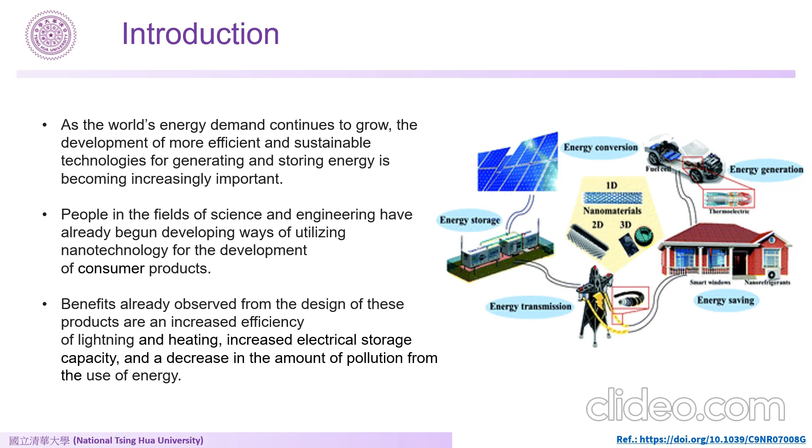If we talk about energy, nanotechnologies provide the potential to enhance energy efficiency across all branches of industry and to economically leverage renewable energy production through new technological solutions. We have an energy source, then the energy source is converted. Further, that energy is distributed and stored and then used. If we look at the diagram, nanotechnologies provide essential improvement potentials for both conventional energy sources and renewable energy sources like geothermal energy, sun, wind, water, tides, and biomass.

Further, talking about energy conversion, conversion of primary energy sources into electricity, heat, and kinetic energy requires utmost efficiency in fossil fired gas and steam power plants. It would help to avoid a considerable amount of CO2 emission. Higher power plant efficiencies, however, require higher operating temperatures and thus heat resistant turbine materials.

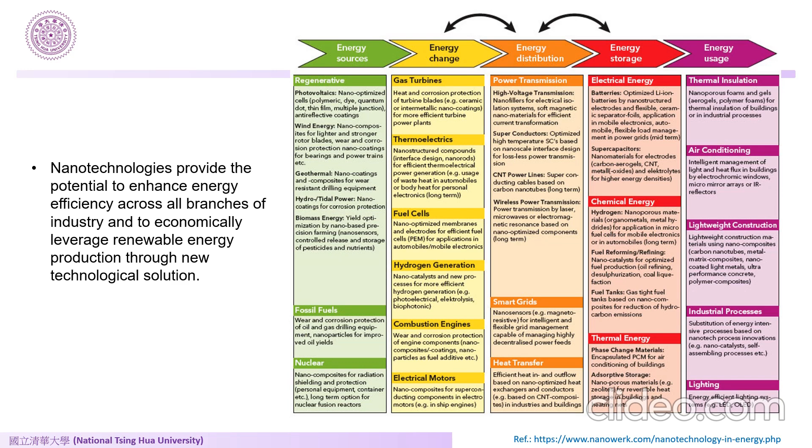Commonly used nanomaterials in energy. There are numerous nanomaterials that are used today for the storage and production of green energy. But the most commonly used for decades are graphene based materials. There is enormous interest in the use of graphene-based materials for energy storage. The research on use of graphene for energy storage began very recently, but the growth rate of related research is rapid.

Due to its high surface area, large electrical conductivity, lightweight characteristics, chemical stability, and high mechanical flexibility, graphene can increase the energy capacity, charge rate, and stability of lithium ion batteries. In practice, the lifespan and recharging time of batteries used in electronic applications, ranging from electric vehicles and mobile phones to laptops, could significantly improve. Among various organic and inorganic materials, graphene exhibits strong potential to meet energy demand in various ways. Graphene and its various composites can also be used in supercapacitors to enhance power density and rate performance.

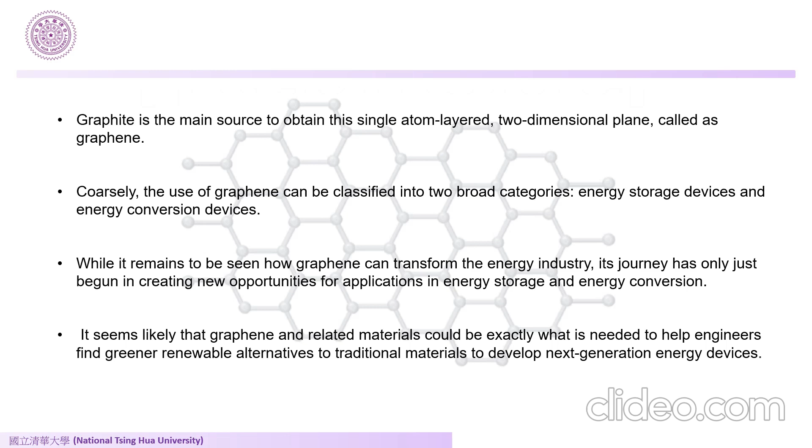Graphite is the main source to obtain the single atom layer, two-dimensional plane called graphene. The use of graphene can be classified into two broad categories: energy storage devices and energy conversion devices. While it remains to be seen how graphene can transform the energy industry, its journey has only just begun in creating new opportunities for application in energy storage and energy conversion. It seems likely that graphene and related materials could be exactly what is needed to help engineers find renewable alternatives to traditional materials to develop next generation energy devices.

Next we come to silicon based nanosemiconductors. Silicon based nanosemiconductors have changed the definition of nanosemiconductors. Silicon nanoparticles are a fascinating area of science with significant technology implications. They are generally considered non-toxic and have good biocompatibility. They utilize silicon nanoparticles in order to absorb a greater range of wavelengths from the electromagnetic spectrum. This can be done by putting many identical and equally spaced silicon rods on the surface.

In the field of storage sensors, silicon nanoparticles are promising materials in various applications due to their unique properties like large surface area, biocompatibility, stability, and excellent optical and electrical properties. The arrangement of silicon particles allows solar energy to be reabsorbed by many different particles, exciting electrons and resulting in much of the energy being converted to heat. Then the heat is converted into electricity.

Lastly, coming to nanocellulose based materials. Nanocellulose offers a unique combination of properties including flexible surface chemistry, transparency, low thermal expansion, high elasticity, anisotropy, and the ability to bind the other conductive materials, enabling extensive application in the flexible energy storage devices.

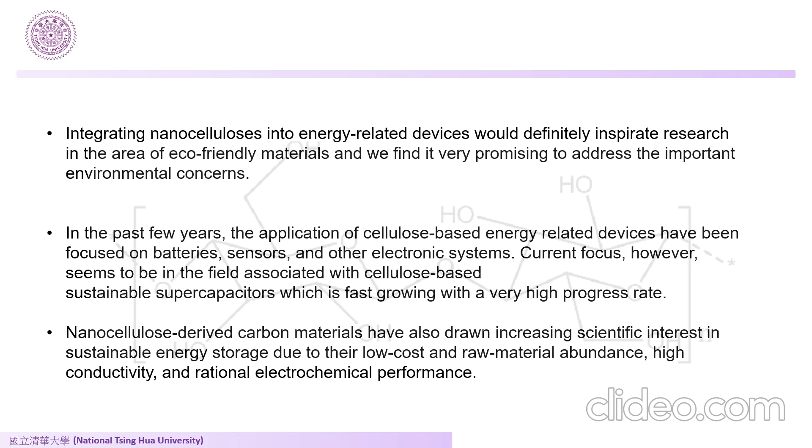So, these are some of the popular materials that have been used for green energy in the environment. Thank you. This will be continued by other group members.

I am Shirish Killeda. I am going to deliver a presentation on energy applications of nanotechnology, and my part is nanomaterials and nanostructures in energy. So, one-dimensional materials. One-dimensional nanomaterials are widely explored with the aim to enhance the energy harvesting efficiency and to enable flexible nanogenerators due to their superior light absorption, excellent electronic conduction, high mechanical strength and ultra-low thermal conductivity.

The advantages of porous one-dimensional nanomaterials for energy storage include: the smaller crystal size increases the utilization of active materials, resulting in enhanced specific capacity. The porous one-dimensional nanostructures provide greater surface area than that of a non-porous system. High surface area ensures effective contact of the electrolyte to the electrode surface, facilitating charge transfer across the electrode-electrolyte interface.

The ion diffusion length is further shortened since creating porosity in one-dimensional nanomaterials can effectively decrease the ion transport dimensions. The pores in one-dimensional nanostructures are usually continuous, which offers interconnected ion diffusion pathways through the electrolyte to the active material. The empty spaces in porous one-dimensional nanostructures accommodate the volume changes associated with the electrochemical reaction, thus limiting structure degradation during cycling. The porous one-dimensional nanostructures can assemble into interconnected networks, avoiding the use of binders and leading to freestanding flexible energy storage applications.

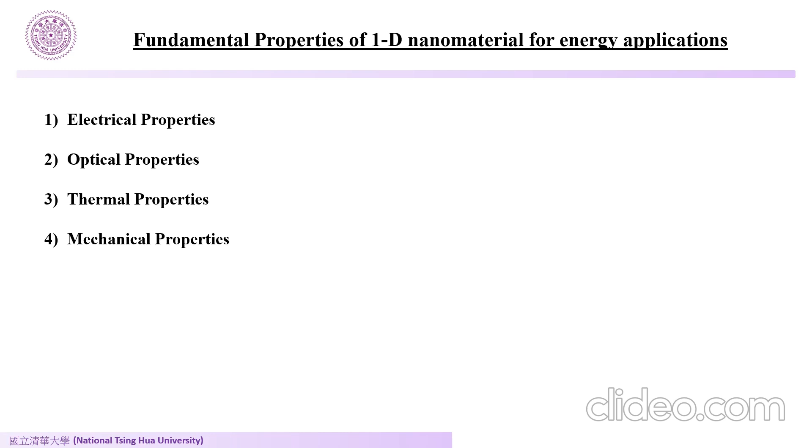The second is CdS nanorods made by mixing cadmium nitrate. The efficiency of CdS nanorods as photocatalysts for hydrogen production can be affected by the fast recombination of the photogenerated electron hole pairs and photo-instability due to its high tendency to be oxidized by the photogenerated holes. To overcome these limitations, these catalysts were modified by adding molybdenum carbide. Mo2C has high electrical conductivity and high catalytic properties compared to other Pt group metal carbides.

The third is the TiO2/Bi2S3 composite. TiO2 nanorods can be synthesized by the sol-gel method. After that, a solvothermal procedure can be used to incorporate different amounts of bismuth sulfide, Bi2S3, onto the surface of the nanorods.

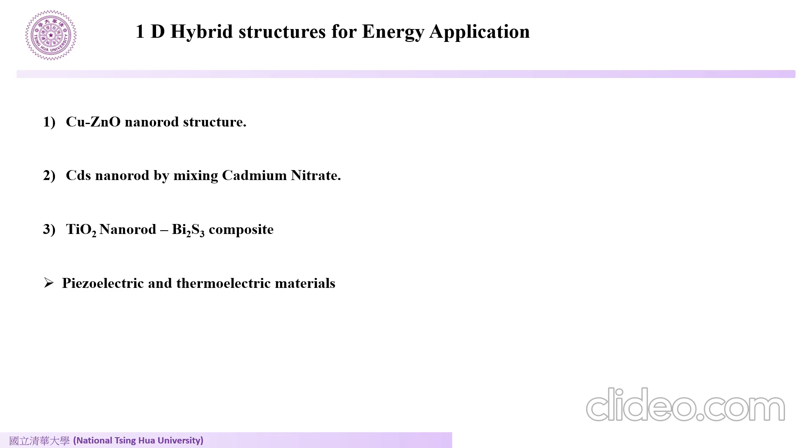When curvature of the material is caused, a displacement of the cations and anions that form the nanowire structure takes place, which causes the appearance of a dipole that macroscopically will cause the appearance of an electrical potential. This effect also can be observed in GaN, InN, CdTe, and CdS materials.

This is a nanocatalysis process in which the trans-esterification of fatty esters into biodiesel occurs. Heterogeneous catalysts are fragmented into metal nanoparticles so as to speed up the catalytic process. They have an increased surface area. They can be easily separated and recycled. The trans-esterification of fatty acids into biodiesel: the base catalyzed trans-esterification reacts lipids with alcohol to produce biodiesel. The nanocatalyst pairs are also used to replace the commonly used sodium methoxide as base catalyst.

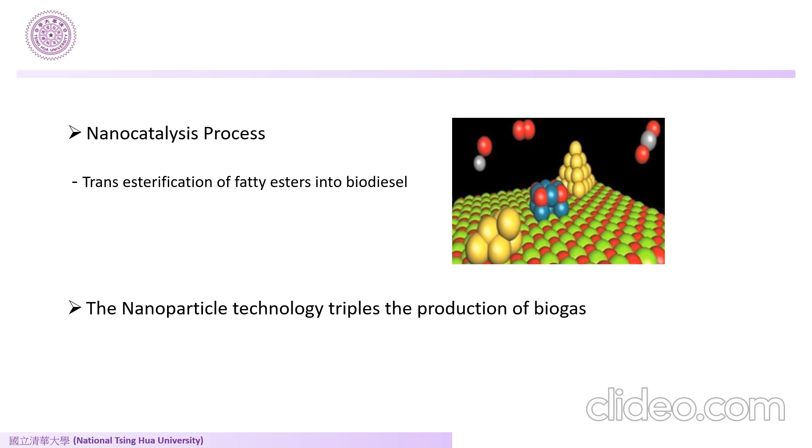The process is economical and recyclable, reacting at mild temperatures and pressures. Third, producing cleaner biodiesel. And fourth, greatly reducing water consumption and environmental contaminants. Nanoparticle technology triples the production of biogas. Biogas Plus involves application of nanotechnology to improve biogas production. The controlled introduction of iron oxide nanoparticles in organic waste treatment can increase the production of biogas up to 3 times. Iron oxide nanoparticles feed the bacteria and enhance the biological efficiency.

So this is energy harvesting by ZnO nanostructures, which involves the introduction, properties, and applications. The introduction involves semiconductor materials and piezoelectric materials. The properties of ZnO involve the one-dimensional and two-dimensional forms of ZnO nanostructures, ability to control the synthesis of various ZnO nanostructures, a wide band gap of 3.37 electron volts, and being biologically safe and environmentally friendly. The applications involve ultraviolet lasers, light emitting diodes, field emission devices, and high performance nanosensors. Doping of various ferroelectric materials into ZnO nanowires and using them in huge industries can be an opportunity.

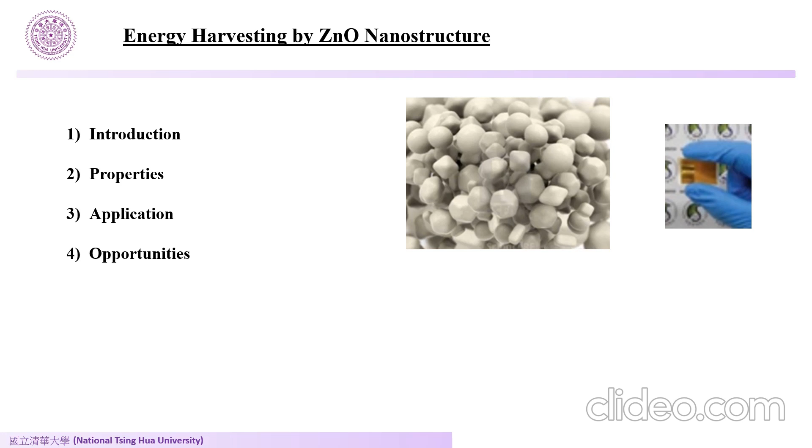The two-dimensional nanostructures for energy applications involve graphene. Graphene is a one-atom thick two-dimensional carbon crystal in which sp2 bonded carbon atoms are packed in a hexagonal lattice resembling a honeycomb. Graphene shows many unique properties such as theoretical surface area, high modulus of elasticity, and good thermal and electrical conductivity. The large specific surface area and good electrical conductivity make it very attractive as a platform for electrocatalytic applications.

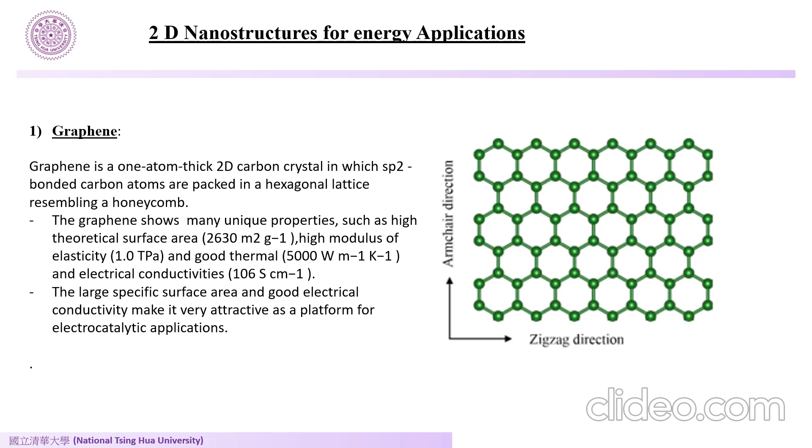So graphene, graphyne and graphitic carbon nitride are also forms of two-dimensional nanomaterials which can be used for energy applications. Graphyne is another allotrope of carbon that is a one atom thick planar sheet of sp and sp2 bonded carbon atoms arranged in a crystal lattice. Different from graphene, graphyne is a semiconductor with a direct band gap. The third one is graphitic carbon nitride.

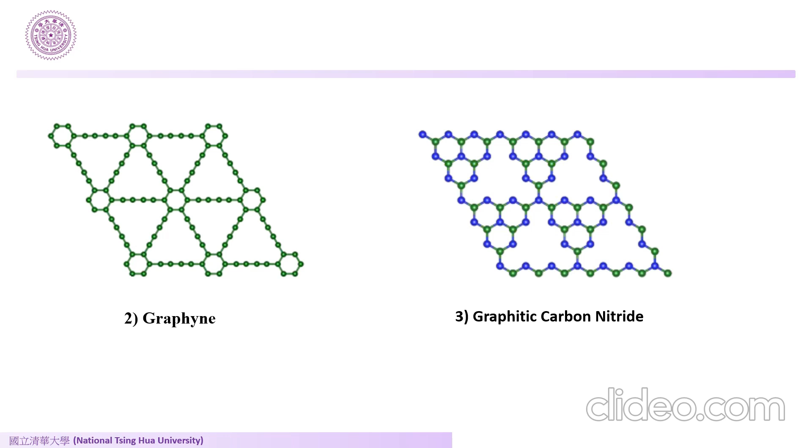Graphitic carbon nitride is a two-dimensional crystal with a van der Waals layered structure and is considered to be the most stable allotrope of the various carbon nitride materials. The crystal structure of g-C3N4 can be described as a hexagonal carbon framework with N substituted carbon through the sp2 hybridized carbon. Due to its band gap of 2.7 electron volts, the semiconducting properties of g-C3N4 make it very suitable for photocatalytic processes. The nitrogen-rich carbon framework of g-C3N4 is another important feature for electrocatalysis.

The fourth one is hexagonal boron nitride, which is called white graphene. Hexagonal boron nitride is an insulator with a thickness-dependent band gap. In electronic and optical devices, hBN nanosheets have been used as dielectric substrates for graphene and MoS2 based heterostructures. For electrocatalysis, hBN needs to be activated.

The fifth one is black phosphorus. It is a layered semiconductor with an orthorhombic crystal structure. One phosphorus atom is covalently bonded with another three atoms to form puckered honeycomb structures in a single layer. The three bonds take up all the valence electrons of phosphorus, resulting in a band gap of 2 electron volts, which can be tuned by controlling its thickness.

Compared to its bulk form, two-dimensional BP nanosheets synthesized by liquid exfoliation techniques possess increased exposed active sites and surface area. Therefore, the intrinsic benefits of these ultra-thin laminar structures can promote the development of BP for efficient electrocatalysis.

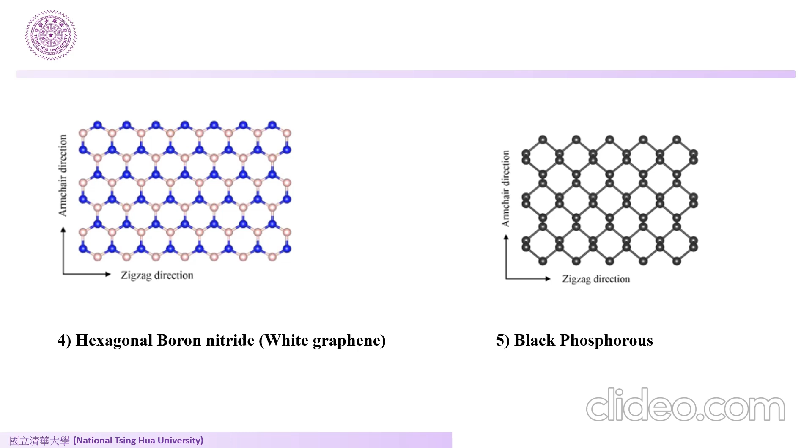This is metal organic framework. It is a porous crystalline compound consisting of metal ions or clusters coordinated to organic ligands forming bulk structures. MOF is important in electrolysis because of its tailorable structures, high porosity, and large surface area. The crystal structures of MOFs can be varied from 3D structures to 2D layered structures.

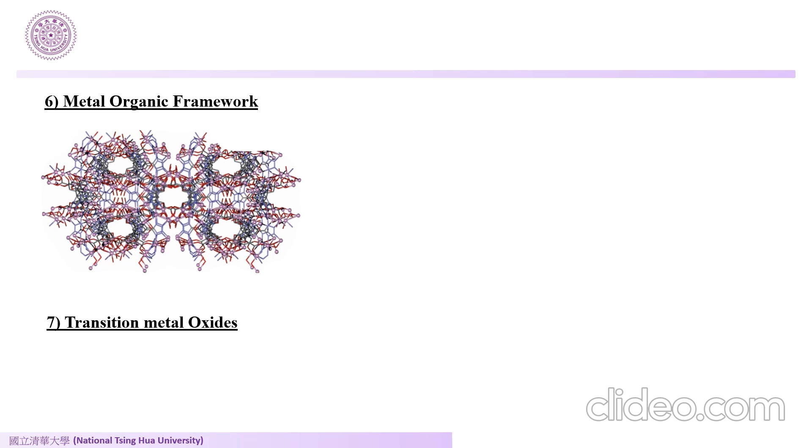Compared to their bulk form, 2D MOFs have highly accessible active sites for electrocatalysis. 2D MOFs have been applied in many electrocatalytic processes including the HER and OER. Another important application of MOFs is their use in the synthesis of metal single atom catalysts. Metal single atom catalysts demonstrate unique properties in a wide variety of heterogeneous catalysts and electrocatalytic processes.

And the last one is transition metal oxides. Two-dimensional transition metal oxides present great potential in electrocatalysis due to their low cost, high stability, and tunable activity. The two-dimensional transition metal oxides are active for various electrocatalytic reactions in the water and carbon cycles. Most of the two-dimensional transition metal oxides can be used as electrocatalysts directly without further modification.

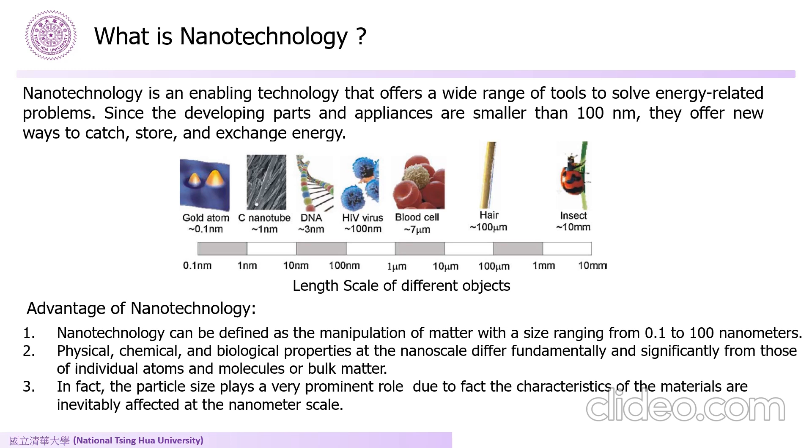But when we talk about energy, human reliance on fossil fuel energy has increased over the past years, which means new renewable energy will play a crucial role in our future energy. One of the sources of new renewable energy is solar energy.

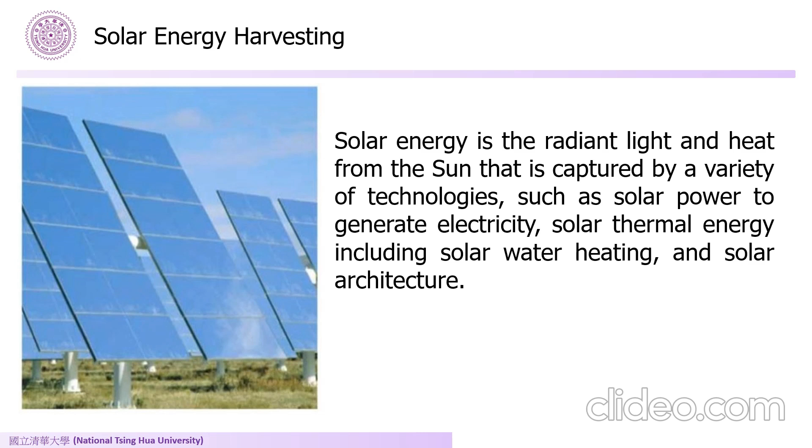One of the most common solar panels is the photovoltaic solar cell. A solar cell is a photovoltaic device that converts light energy from the sun into electrical energy using the principle of the photovoltaic effect. The photovoltaic effect itself is the photogeneration of charge carriers in light-absorbing materials. Simply put, this solar cell converts light energy into electrical power so that we can use this electrical power for different purposes.

In the market, solar cells have several types, for instance, the monocrystalline silicon cell, polycrystalline silicon cell, and amorphous silicon cell. However, in their applications, some solar cells still have some limitations. For instance, solar cells are quite expensive, and the electricity production of the solar cell will be affected by air pollution and weather.

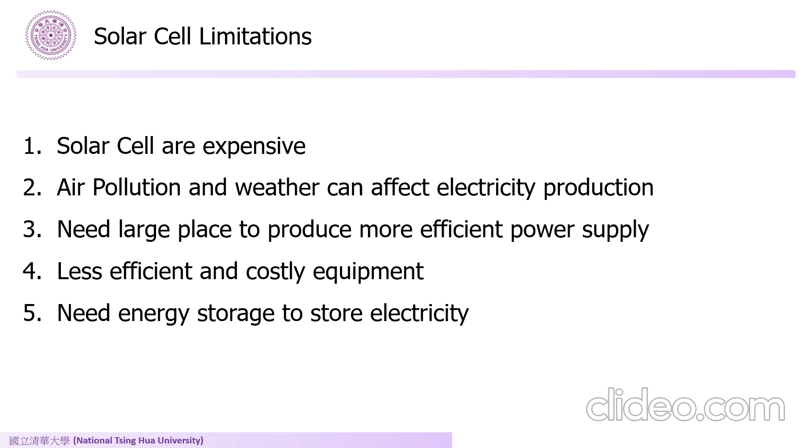And they need a large place to produce a more efficient power supply, have less efficient and costly equipment, and need energy storage to store electricity. To overcome these problems, nanotechnology can play a role.

As you can see in the slide, this is the new generation of solar cell, which we call a thin film solar cell. A thin film solar cell is a second generation solar cell created by depositing one or more thin layers of photovoltaic material onto a substrate. Film thickness ranges from a few nanometers to tens of micrometers, which is significantly thinner than the competing conventional technology.

These thin film solar cells have some advantages. For instance, solar cells coated with silicon thin film of 1 nanometer are most efficient and offer more absorption of photons from the light. Thin films improve performance by 60%. And to lower production cost, thin film solar cells use the roll-to-roll fabrication method.

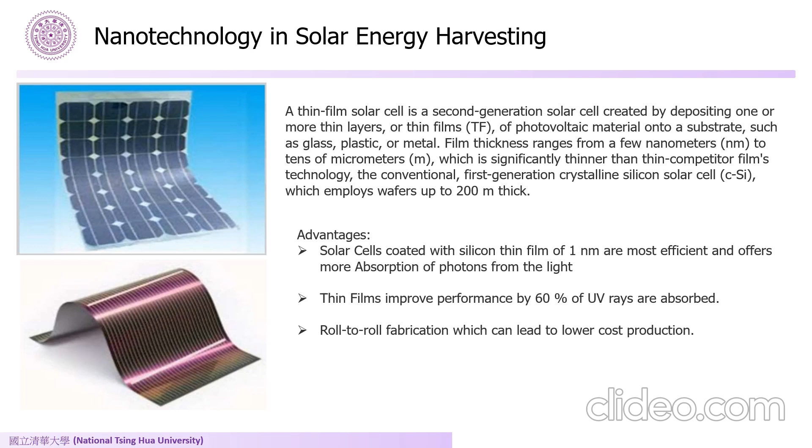Nanotechnology can also be used to increase solar panel efficiency by using nanostructured anti-reflection coating on the solar panel. As you can see in the slide, in application, not all of the sunlight that comes to the solar panel will be absorbed and converted into electricity, and this phenomenon decreases the power capacity of the solar panel.

To solve these problems, we can use anti-reflective coating. Anti-reflective coating is a type of optical coating applied to the surface of lenses and other devices to reduce reflection. This improves the efficiency of the system since less light is lost. Some materials that can be used as the AR coating are aluminum oxide, silica, titanium dioxide, and zinc oxide.

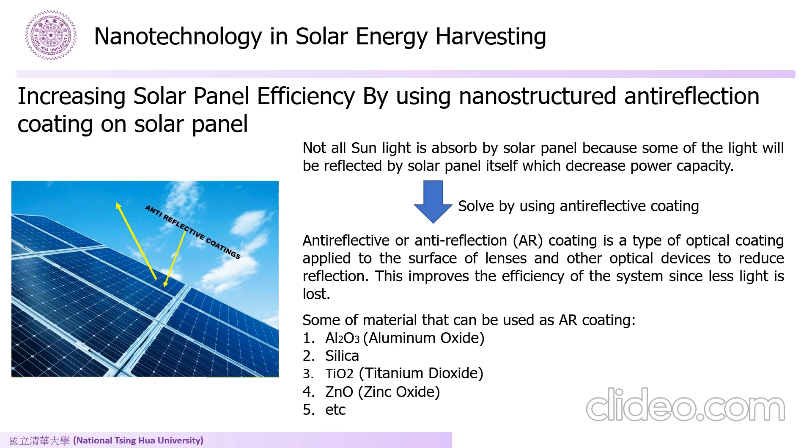Further, we can improve solar panel efficiency by using self-cleaning solar panels. As mentioned before, one of the problems of the solar panel is that electricity production is affected by air pollution and weather conditions, which means that if the solar panel is located outside, it has a chance to get dirty or dusty.

These conditions prevent the solar panel from absorbing more sunlight, which makes the conventional solar panel require more cost for cleaning and maintenance. And this dirty solar panel can reduce power generation. However, this problem can be solved by using self-cleaning solar panels, or super hydrophobic surfaces, to improve the performance of the solar panel.

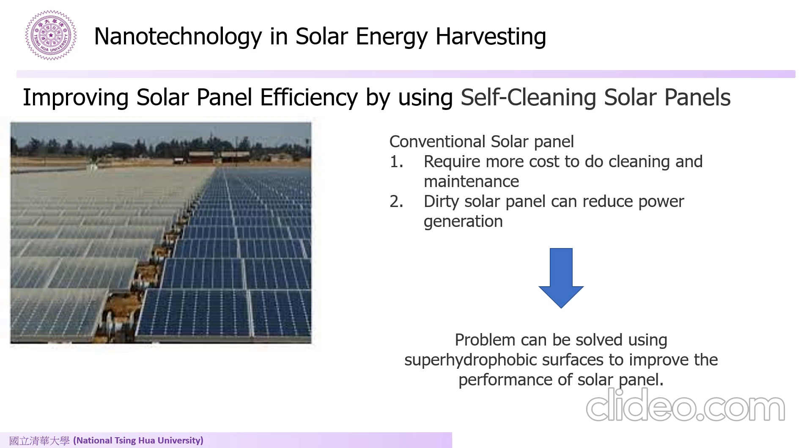So by using this method, the dust will not be able to stick to the solar panel surface, and it will increase the power generation of the solar panel itself. The next is nanotechnology in wind energy harvesting.

Wind power or wind energy refers to the process of generating mechanical power or electricity using the wind. The wind turbine converts the wind's kinetic energy into mechanical energy, which can be utilized for a specific purpose or converted into electricity by a generator. As you can see in the slide, this is the construction of the wind power generator, including the blades and the generator itself. And this is the power production flow chart of the wind turbine generator.

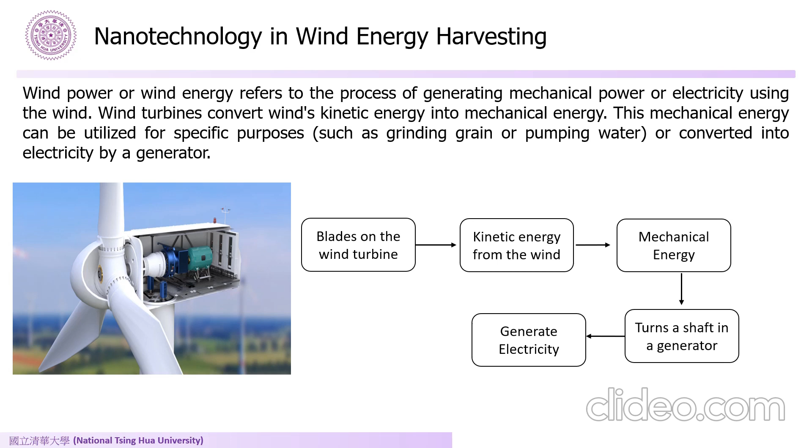In terms of blades, carbon nanotubes are developed to make blades stronger and lighter for improving energy efficiency. And in terms of lifetime, using nanopaints can increase the wind turbine lifetime.

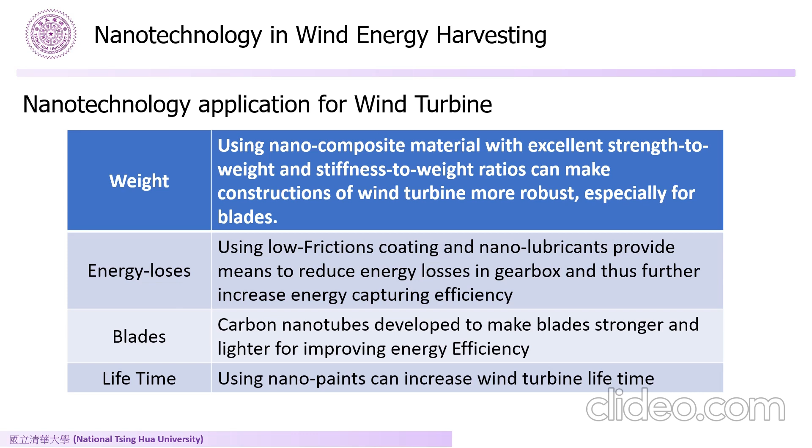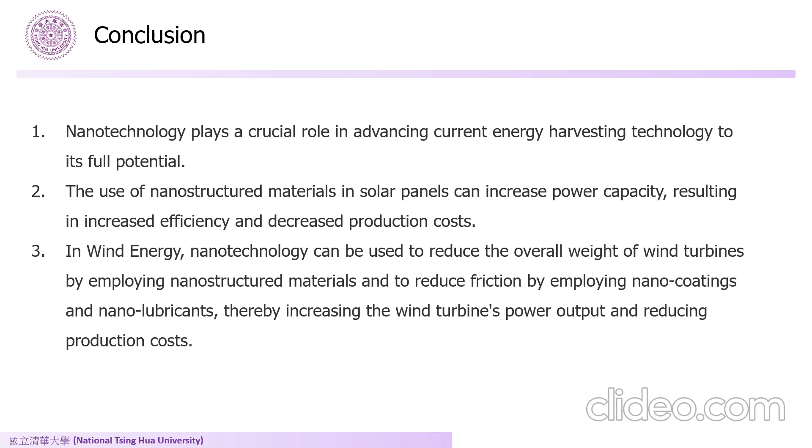Conclusions. First, nanotechnology plays a crucial role in advancing current energy harvesting technology to its full potential. Second, the use of nanostructured materials in solar panels can increase power capacity, resulting in increased efficiency and decreased production cost. And in wind energy, nanotechnology can be used to reduce the overall weight of wind turbines by employing nanostructured materials and to reduce friction by employing nano coatings and nano lubricants, thereby increasing the wind turbine's power output and reducing production cost. Thank you.